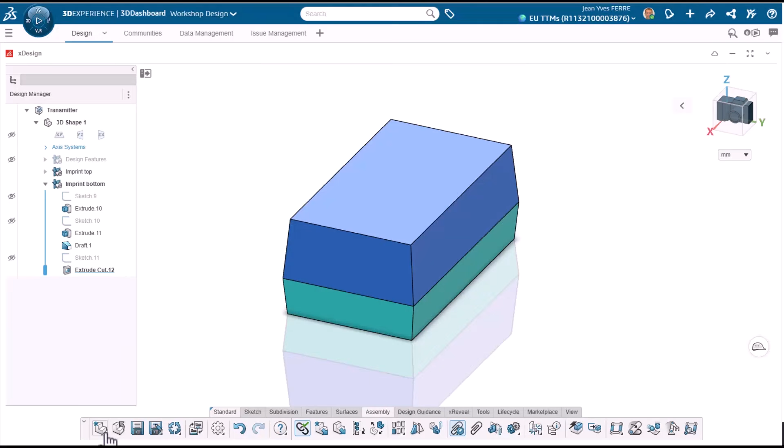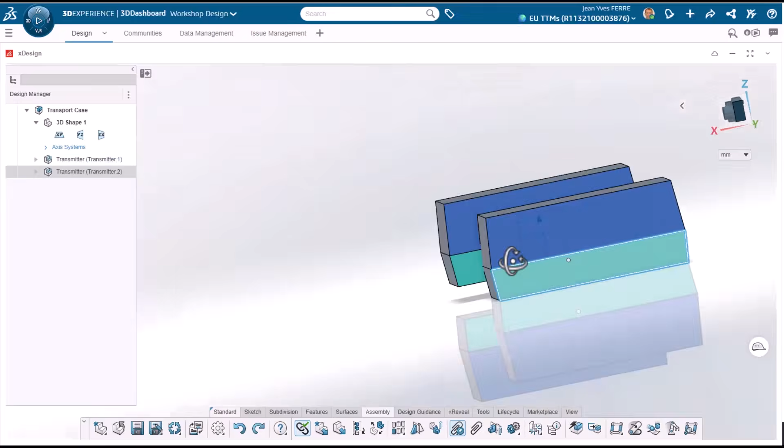Let's jump into xDesign. To start, I create a new part from the menu. Then I insert the existing blue components from the recent components list. The first component is fixed by default, which is perfect for positioning. Since I need two of them, I simply use the universal copy and paste. Selecting the components on the left gives access to the manipulation arrows, so I can rotate and position them correctly.

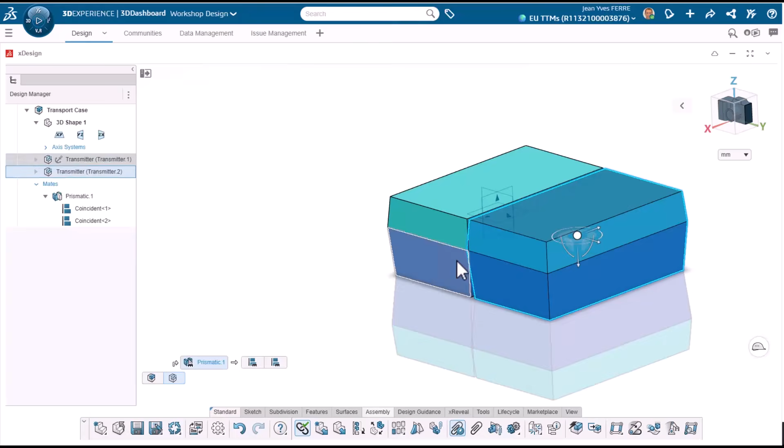To fully constrain the inserts, I use standard mates. All xDesign components include default reference planes, so I simply Control-select two planes, and the contextual toolbar proposes the most relevant mate. Most of the time that's coincident, so it's first on the list. To improve visibility, I temporarily hide the top parts. Then I roughly position the inserts and finish with a distance mate of 2.5 mm between two vertices. We can now start designing the actual box.

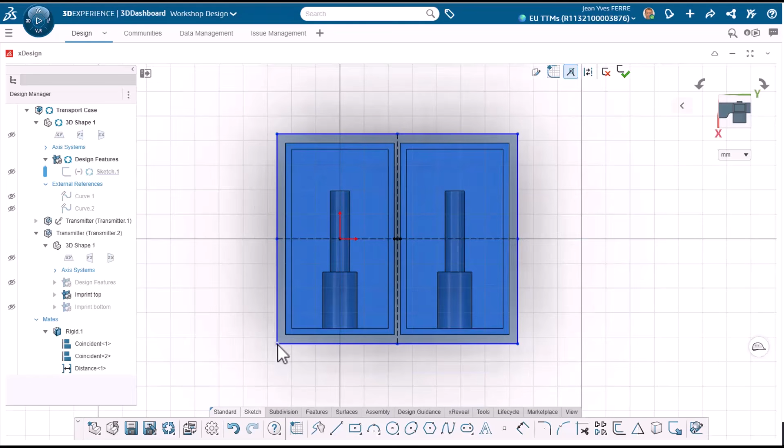To define the outer shape of the bottom case, I start with a sketch. First, I create a construction line and place a midpoint to center the design. Then I create a center rectangle around the inserts. Because the rectangle is centered, I only need to control dimensions on one corner. When the sketch geometry turns black, it means it's fully defined.

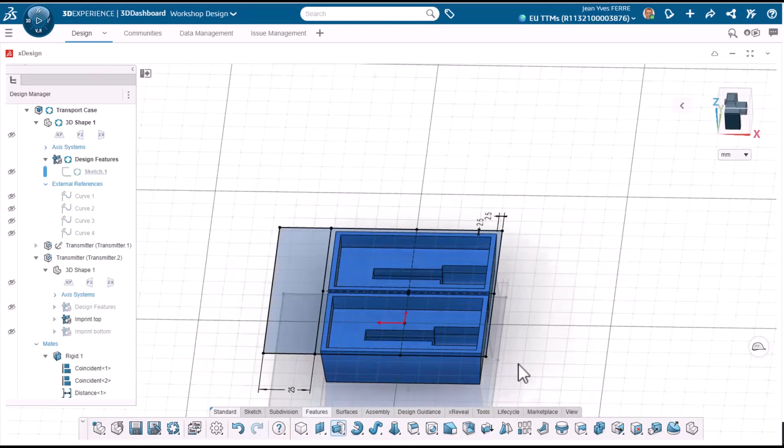Next, I create another rectangle that will define the charging cable cavity. To constrain it properly, I simply drag one endpoint onto the other rectangle until they become coincident. Now the sketch is ready, I transform it into a solid extrusion. Next, I need to decide the height of the case. After a few quick tests, 22 mm looks like a good compromise, strong enough without making the case too bulky.

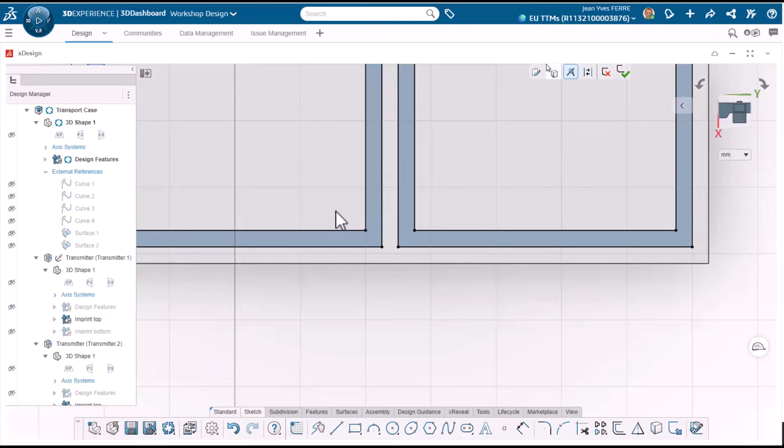Now we need to create cavities for the inserts. Instead of redrawing their shape manually, I want the geometry to stay linked to the original parts. So I simply convert the edges of the blue components into the sketch. This creates a parametric link, so if the inserts ever change, the box will update automatically.

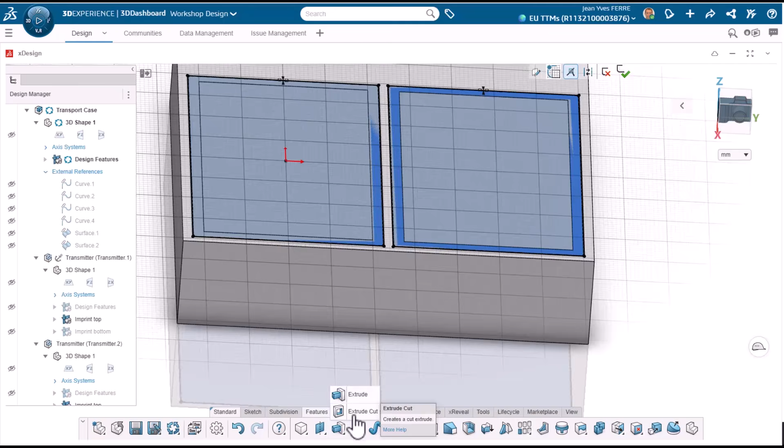Before going further, here's something important for 3D printing. Later in the video you'll see why the 0.2 mm tolerance I'm adding here is critical for this design to work correctly. For now I create an offset of 0.2 mm around the insert geometry. I also account for the 5-degree draft already present on the inserts.

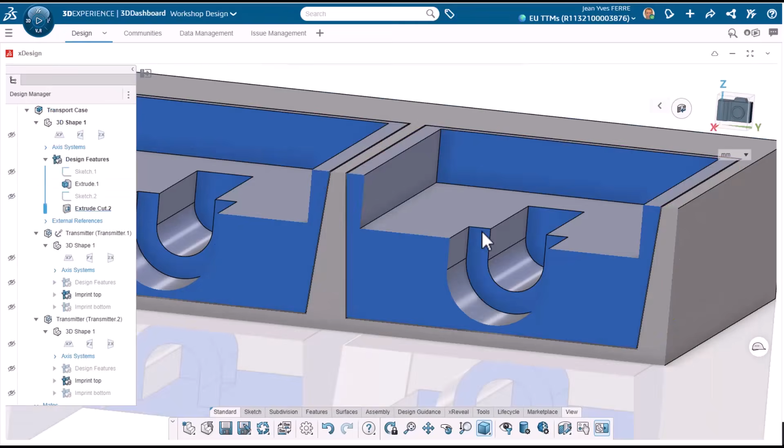Let's take a quick look in section view. As you can see, the gap and the draft angle look correct. I also add 0.2 mm clearance at the bottom of the cavity, so the inserts will never protrude above the surface of the case.

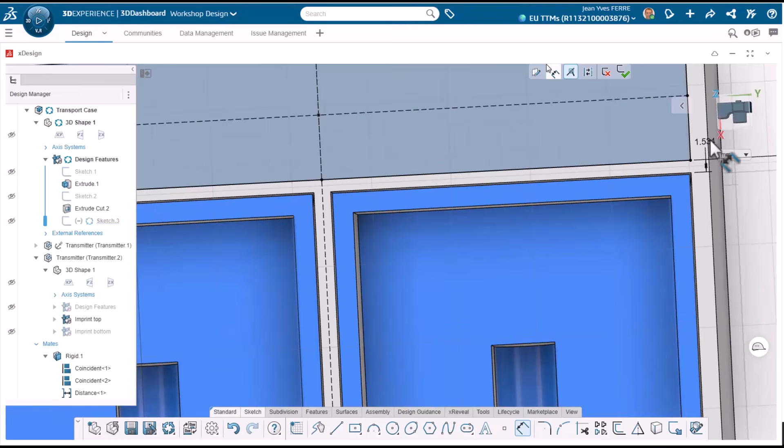Next, I create the charging cable cavity. Again, I leverage existing geometry to find the center of the part, and I create a center rectangle. I don't use the entire available space because I want to leave room for something that will keep the box closed later. For now, I just dimension the sketch and link it with the other cavities, so everything updates consistently. Once the sketch is ready, I use cut extrusion to create the cavity. xDesign conveniently keeps the previous depth value.

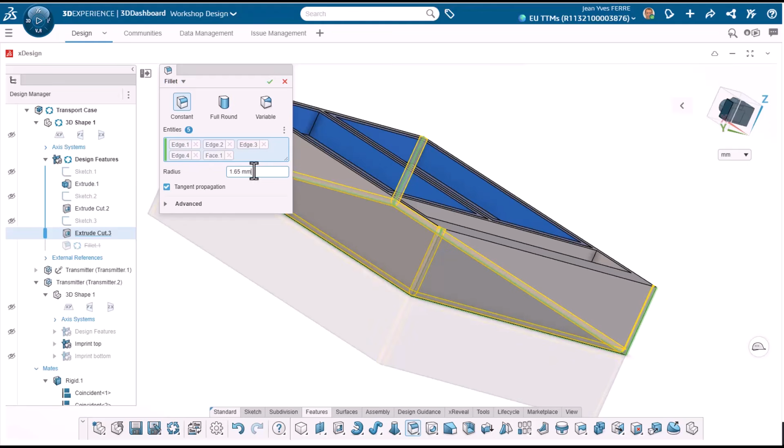Since this case will be stored in a bag, sharp edges could damage other objects, so I add rounded corners on all external edges. After testing a few values, 6 mm fillets look better than 4. But when working with hollow parts, it's always important to check how fillets affect the internal thickness. Let's check again with section view.

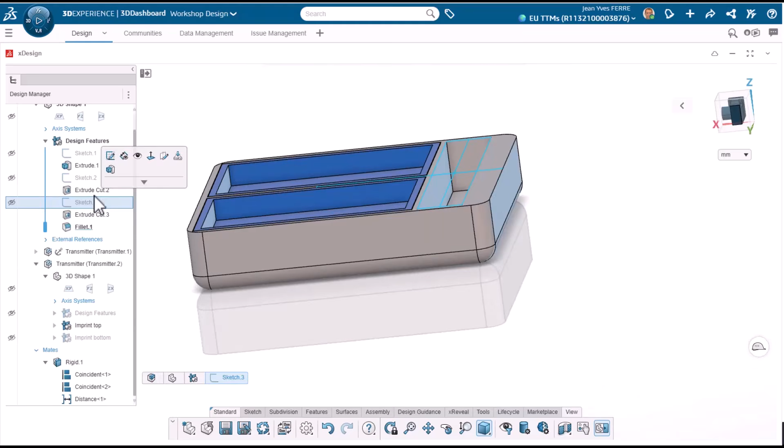The insert cavities look good, but the cable cavity is getting a little too close to the bottom. That could weaken the part. So I reduce the cavity depth from 20.2 mm to 18 mm. At the same time, I increase the width slightly to keep enough space for the cable. So now the bottom case is fully defined: outer shape, insert cavities, cable storage.

Now we can design the top part of the box. First, I make the upper inserts visible again so they can guide the design. Then I create a new geometrical set and rename it top case. After activating it, I can start designing the lid.

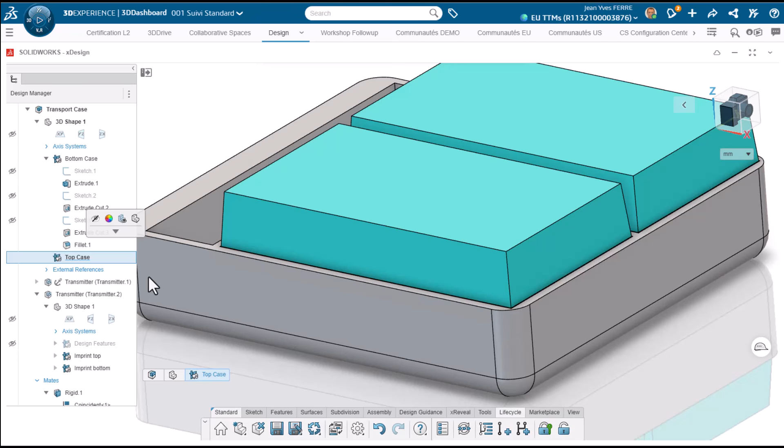Since we're using parametric CAD, we should reuse existing geometry whenever possible. So I project the bottom case outline into a sketch. That way I don't need to enter new dimensions. If the bottom changes, the top updates automatically.

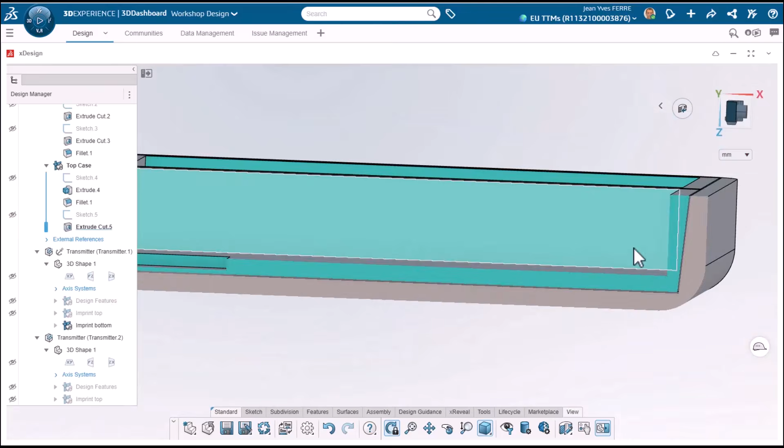Next, I create the insert cavities using the same process. I project the insert boundaries, measure their depth, and add 0.2 millimeters clearance. And this is where the tolerance we added earlier becomes important. Without that small gap, the inserts would simply get stuck after printing, and you just couldn't close the case.

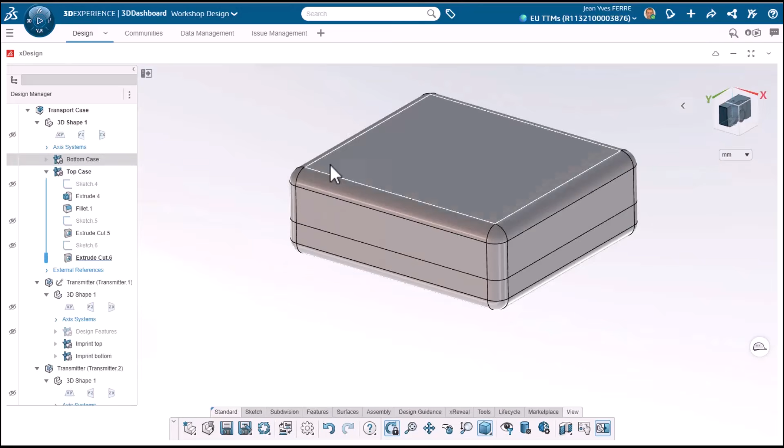Now comes the interesting part, the hinge. Remember earlier when I said designing a hinge for 3D printing can be tricky? The problem is clearance. If the geometry is wrong by just a few tenths of a millimeter, the hinge simply won't move after printing. So let's design it carefully.

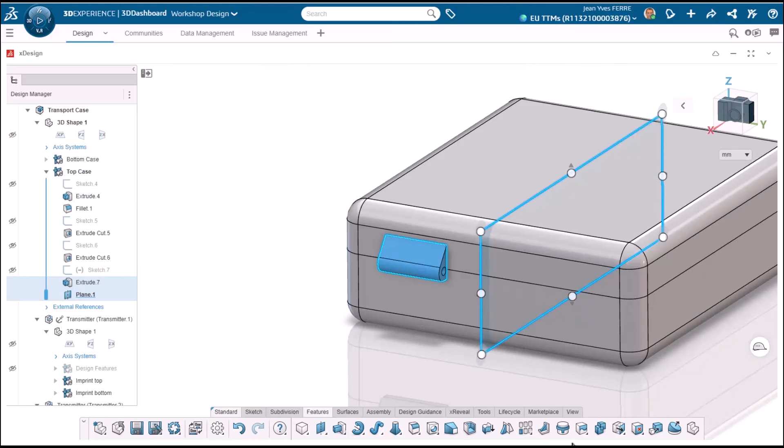I start by sketching the hinge profile on the side plane using lines, circles, and arcs. Then I create an extrusion using the mid-plane option, so the geometry grows symmetrically. I modify the sketch so the hinge can accept 3mm bolts, and I reinforce the geometry slightly. To make it easier to distinguish the parts, I also change the color of the top component.

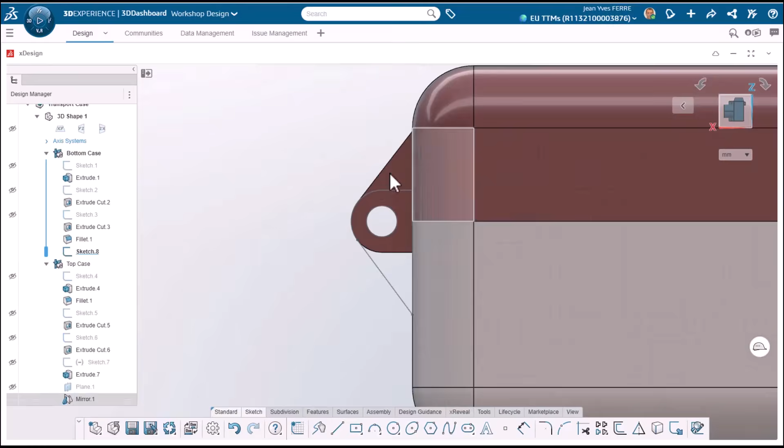To allow the hinge to move freely, I add a small clearance gap. Using advanced extrusion settings, I start the feature 0.1 mm away from one face and end it 0.1 mm before the other. That small tolerance is essential for 3D printed assemblies.

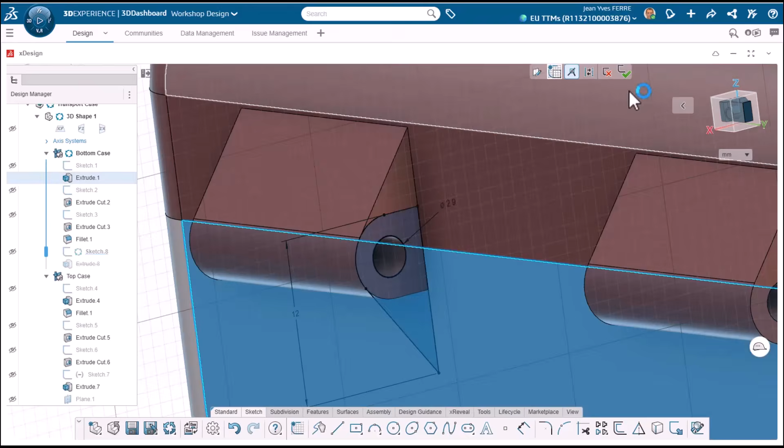For the screw holes, I reduce the diameter to 2.9 mm, so the screws can create their own threads in the plastic. Then I need to cut out a hinge segment. Look how I can use the sketch I created on existing solid geometry to start further, where I needed to. This will avoid creating a plane that would be used only once. Very convenient. And now I just have to mirror this segment to the other side to finish the hinge design.

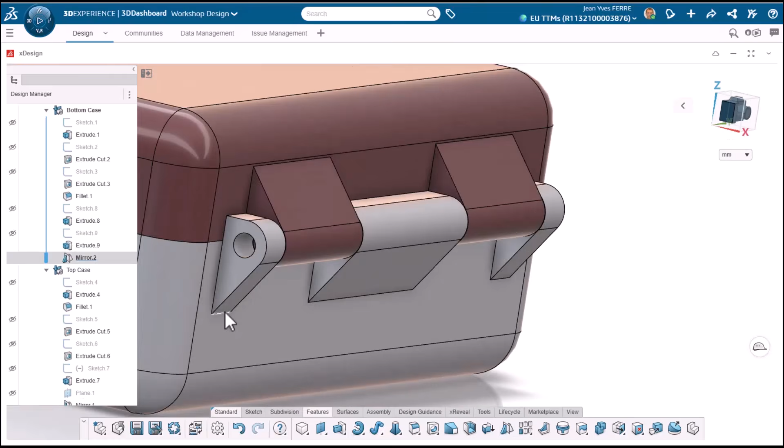Finally, I add fillets so the hinge can rotate. At first the hinge would block the movement. But here is the trick. The fillets must share the same center as the hinge axis. Once that's done, the lid opens smoothly and the hinge works perfectly.

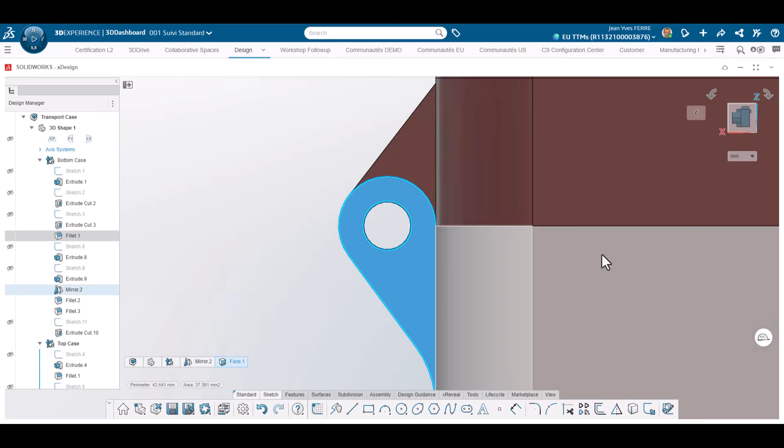So now we have the bottom case, the top case, a fully functional hinge. All that's left is making sure the case stays closed. Remember the empty space we left earlier near the cable cavity? This is where we add a magnet. Since I don't want to extend the external shape of the box, I use a rectangular magnet. I create a centered rectangle and cut a small recess.

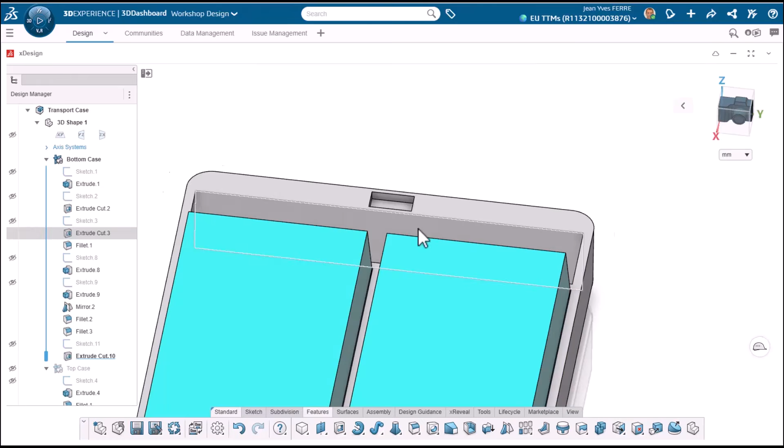To align the pockets perfectly between the lid and the base, I simply project the sketch from one part to the other. If I change the magnet size later, both pockets update automatically. This keeps both features linked, as we can check in the section view.

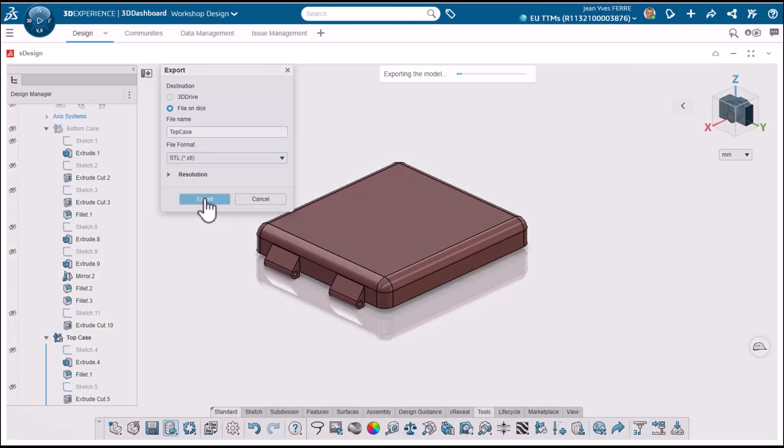Now it's time to make things real. Using the Print 3D tool, I check the orientation and verify the parts fit inside my printer. That would be embarrassing if they didn't. Then I export the parts as STL files. Good news, both pieces fit on the build plate, so I can print them in a single job. And now, it's printing time.

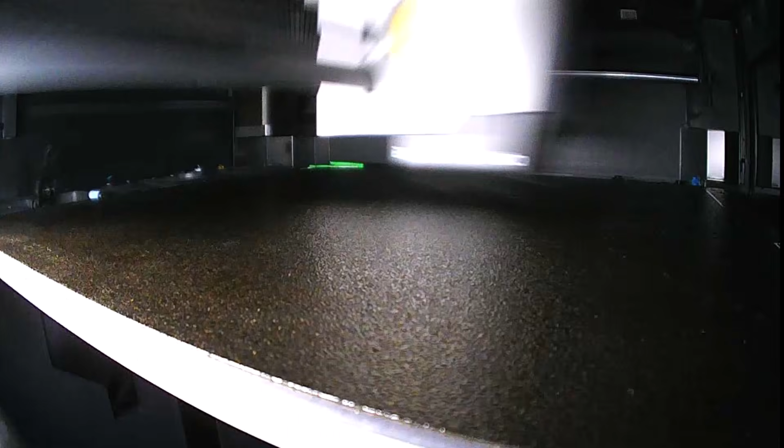Once printing is finished, assembly is quick. First I glue the magnets, then I glue the blue inserts. You'll notice I use less glue on the inserts than on the magnets. I forgot to record the screw installation, but it's straightforward. After tightening the bolts, I test the hinge. It's strong and smooth, exactly what we want.

And here's the final result. The inserts hold everything securely. The hinge opens smoothly, and the magnets keep the case closed. Exactly what we designed.